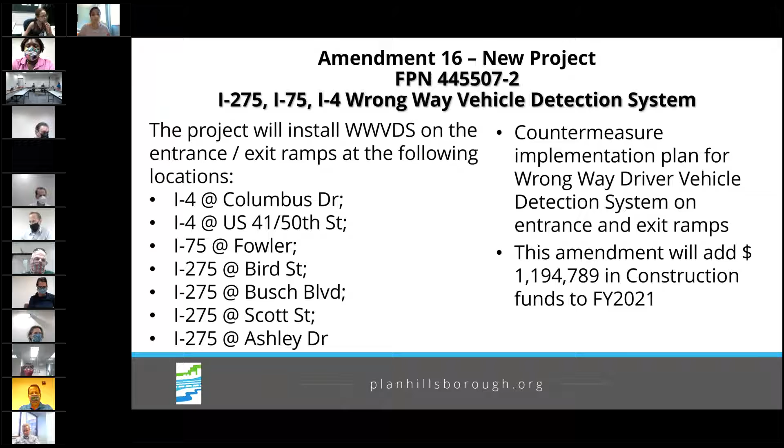Again, this is the comparative report. As you can see, the funds added are ACID, which is Advanced Construction of Safety Intersection Crashes, adding up to 1.2 million, added to FY 2021 as construction funds. It's part of the Vision Zero project for the LRTP reference.

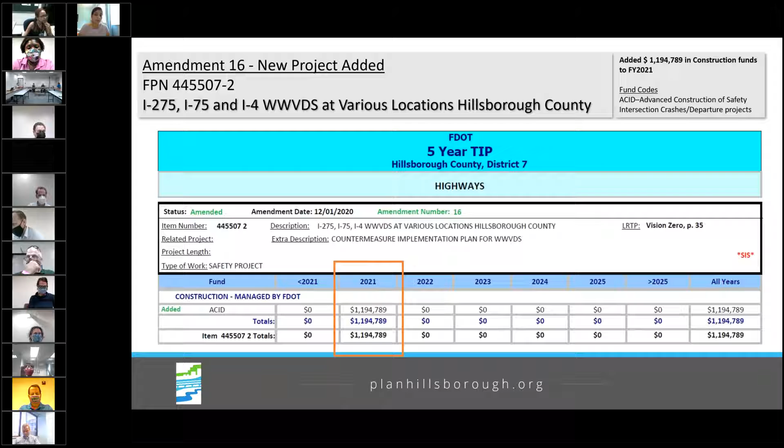The third amendment is also a new project, for adding various lighting in the corridors at various locations in Hillsborough County. FDOT has identified 5 corridors along Hillsborough County to help with the lighting retrofit at existing poles. Previously the lights used to be yellow lights, and they are upgraded to the latest LED technology, which will help with better safety.

These locations were specifically added based on nighttime crashes, and it helps to mitigate that. The various locations are Hillsborough Avenue from Dale Mabry to 275, 301 from Baum Road to Bloomingdale Avenue, 674 College Avenue from US 41 to State Road 60, and US 301. This amendment will help add about 1.835 million to construction funds in FY 2021.

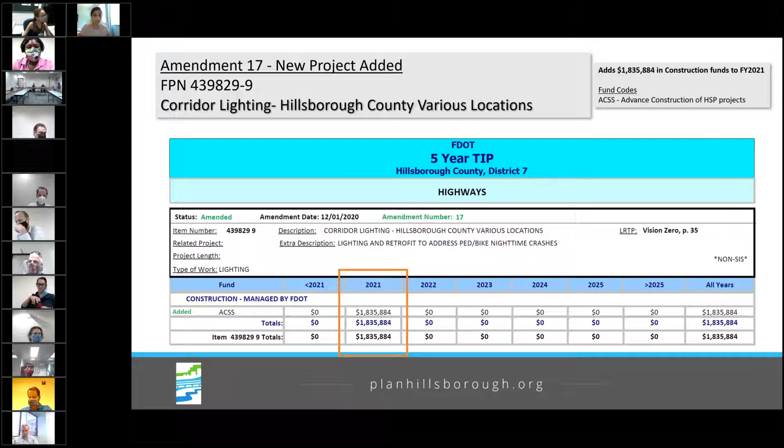With this, I will move on to the last slide, which will show my request. My recommended action is to request you approve these TIP amendments and forward them to the board for approval. If you have any questions, you can ask them now. Thank you.

Okay, any questions for anyone? About anyone?

Okay, Nicole, have a question? Yes, I just wanted to know for the wrong direction indicators, were those 5 areas of instance where that happened? Do you know?

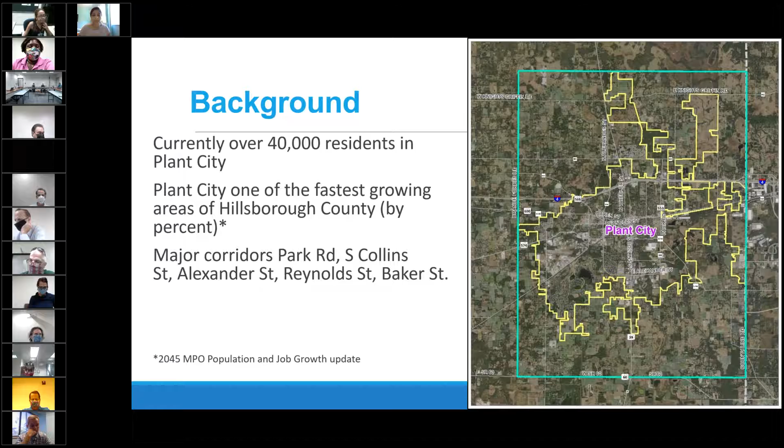Next slide please. I would also like to tell you the study purpose and outcomes. The study will be exploring two kinds of transit options in Plant City. One is a transit circulator, which will provide operations within downtown Plant City. The second is an express route or limited stop service, which will operate from Plant City to Tampa. We will also explore the possibility of providing a service to Lakeland in the future, but that will require further coordination.

We evaluated the routes and services based on the cost, potential ridership, and performance measures - I will go over them in detail. At the end of the study, we will identify the service areas, which are the current areas and the future growing areas to meet the demand for growth. The study will recommend a set of final proposed alternatives, which we would present to HART and Plant City, and also the MPO committees and the board. The final decision will be made after this report, with talks from Hillsborough, HART and Plant City.

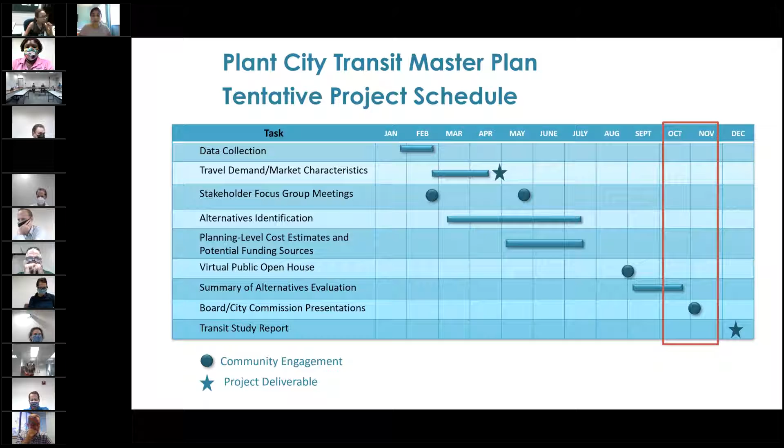Next slide please. Again, as I mentioned, we started the study back in January. We've had several stakeholder focus group meetings throughout the study, and we've also been presenting to the committees, HART, and Plant City. The final part of the study will be a transit study project report, which we are currently working on in draft form, and then it will come to the board for final approval.

Next slide please. Because we wanted to explore what was available in the past, the study looked at previous transit service that existed, and I will go over them. Next slide please.

As some of you might know, Plant City had two kinds of transit services in the past at different points of time. The first was a Strawberry Connector, which operated from 2001 to 2005. It was initially run by HART, and later the city took over it until 2008. The highest annual ridership was almost 47,000 at the peak in the 2006-07 years, but finally they had to cut it down due to cost constraints. The second service was an express service called the 28X East County service, which operated two services initially, and then was cut down to one, from Plant City to Tampa, from 2010 to 2017.

It also saw peak annual ridership around 2012. Later it had to be cut down when HART had to do its comprehensive operation analysis and redo their budget.

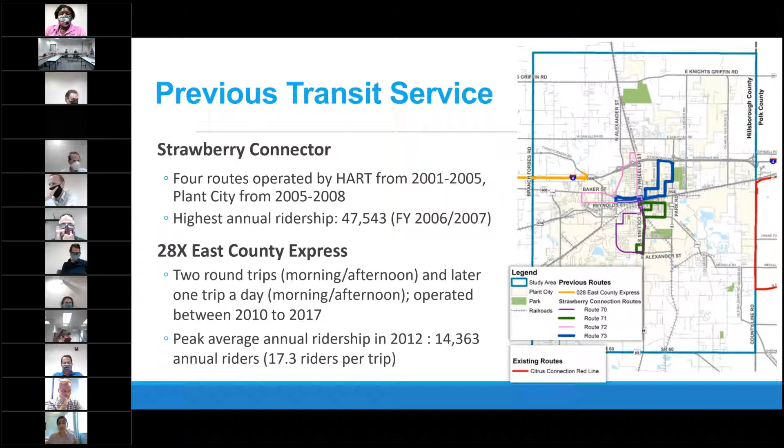Currently, if you notice in the map, the yellow line shows the 28X, and the other four colors around downtown show the Strawberry Connector. But currently there's only the Citrus Connection, which is the red line, operating in Polk County along County Line Road.

The study explored the commuting characteristics and existing conditions to know what exists today and what will be needed for the future.

Among other factors, we looked at commute patterns in zero-car households. It can be seen that 84% of workers drove alone. 18% of residents travel less than 10 minutes to work, meaning they live very close to their place of work. The mean travel time is approximately 24 minutes, and about 2% of households have no vehicles.

If you look at the map, the areas with darker colored shades show zero-car households, and the darker the color, the more households. These are the people who need transit the most.

Upon analysis with the MPO's communities of concern map, which includes people falling under categories like minority, racial, or limited English proficiency, this map also lined up almost according to the communities of concern map, meaning these people also need transit the most.

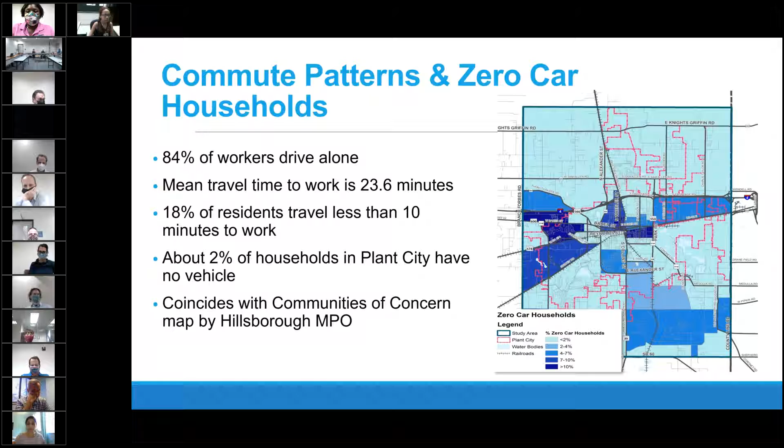They are mostly for doctor appointments, medical trips, grocery, and family, childcare, community center, etc. But people have to qualify as low income to be able to ride the Sunshine Line, so that's another constraint.

A main part of the study was the outreach efforts. I will go over them in detail.

As mentioned earlier, we had community stakeholder meetings at various points of the study. The first was in February 2020, conducted at Plant City Hall. We had close to 30 attendees, and it helped identify the stakeholder group.

The second meeting was unfortunately virtual, in May 2020. An initial set of alternatives was presented to the committee through a GoToWebinar meeting. Following the meeting, we distributed a survey with around 120 responses, which helped shape the alternatives better.

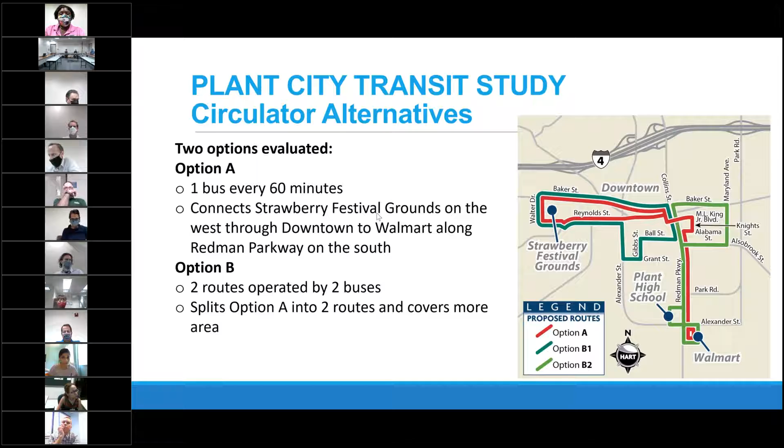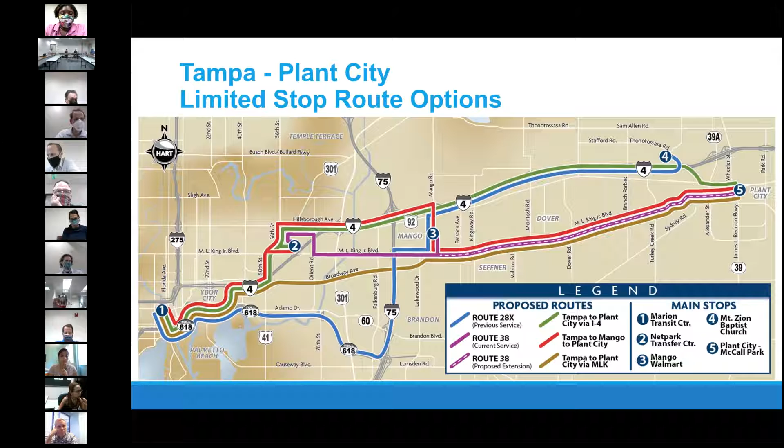Please remember these are only planning-level cost estimates and do not represent final costs. The operating costs vary roughly between $900K and $1.2 million. The frequency also varies between 45 and 60 minutes, operated by 2 buses. The distance is pretty much the same across options, except for the extension, which covers a lesser distance.

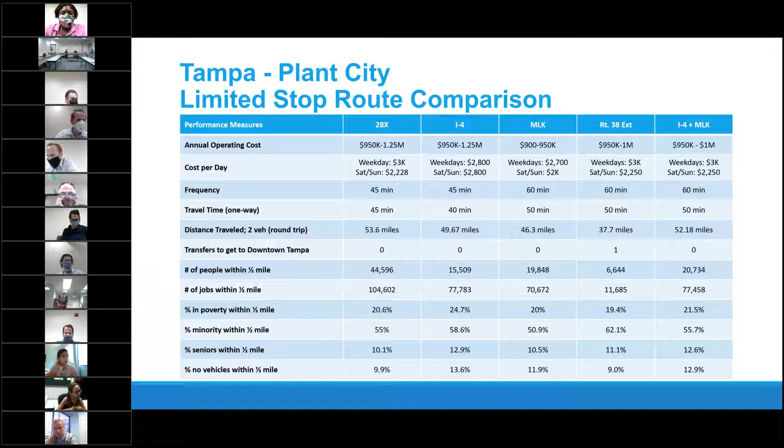The number of people served by different routes varies — I'll give you a minute to look at this. Some routes serve more people than others; these were only explored as possible route options. The number of jobs served also varies for each of the 5 options, but the cost is what will be used as a comparative measure for the performance measures. With that, we can move to the next slide.

So I had mentioned earlier that we did have 2 surveys at different points of the study. One was to the stakeholder committee, but there was also an open to the public survey. We distributed it through our social media and also through forwards from our stakeholders, who were passing the information to some of their connections. And the second one was a virtual open house.

What we learned from these surveys was that people were generally in support of the service. It would open up more opportunities for jobs and economic growth, but there was a challenge of providing reliable connection and coverage for all the services. The public also perceived that they needed a better transit hub connection at Plant City downtown, requiring more comfortable facilities and shorter waiting times.

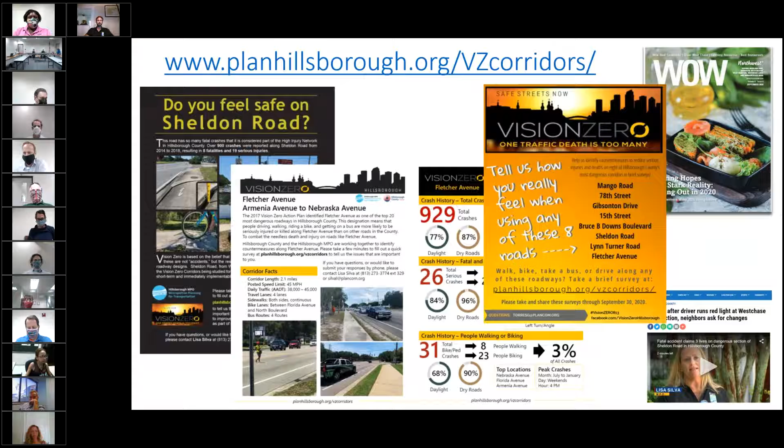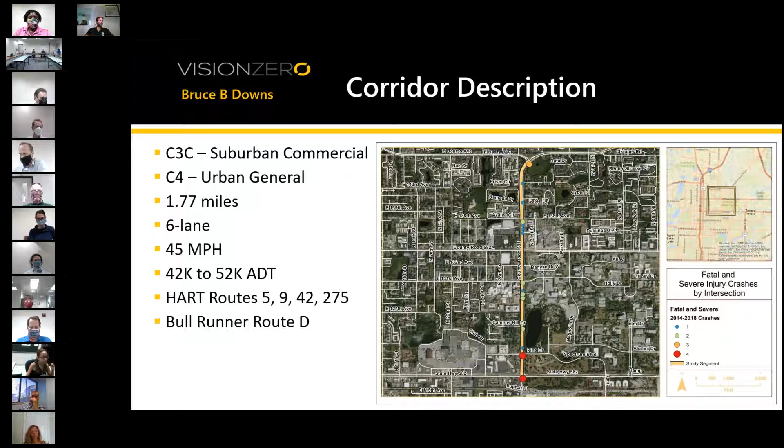So starting with Bruce B Downs, I'll go through some of the recommended improvements. This corridor description: it is a 6-lane corridor, 45 miles an hour, 40 to 50,000 cars per day, so a busy route.

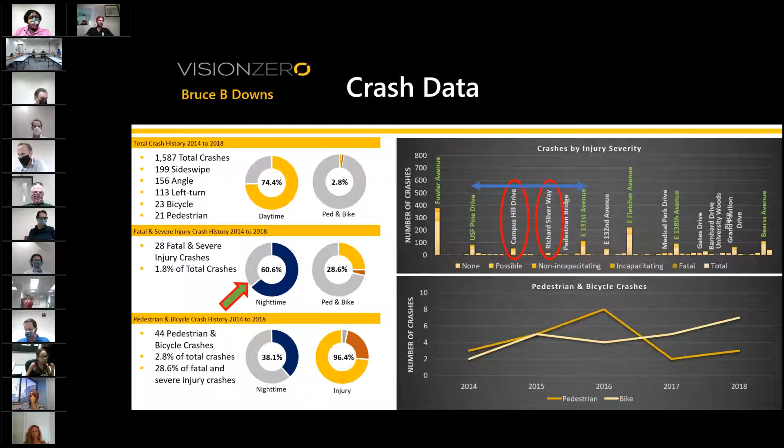Just a little look at the crash data. You can see that the big ones were Fowler, Fletcher, and Bearss in terms of total crashes.

And then just a quick look at some upcoming projects in that area: new traffic signals at Campus Hill Drive and Richard Silver Way, and the construction of a new 10-foot sidewalk along the east side of Bruce B Downs along the university.

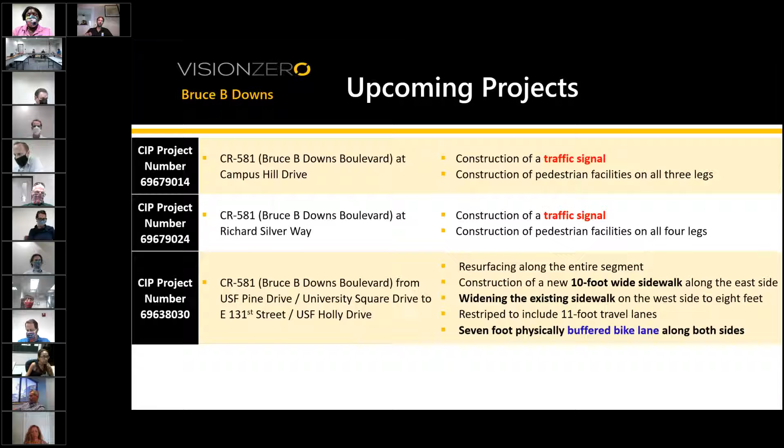So corridor-wide, some of the recommendations. One is lowering the target speed to 35 miles per hour, and 40 from Fletcher to Bearss.

That will be accomplished, or is proposed to be accomplished, by having a dedicated shared use path, channelization of pedestrians to those protected crossings, and reducing the width of the travel lanes for at least the segment from Fletcher to Bearss. As far as ADA, upgrading all of those crossings to ADA compliant crossings.

Some signage and pavement markings, as well as roadway and drainage improvements, and lighting improvements at the signalized intersections in those locations.

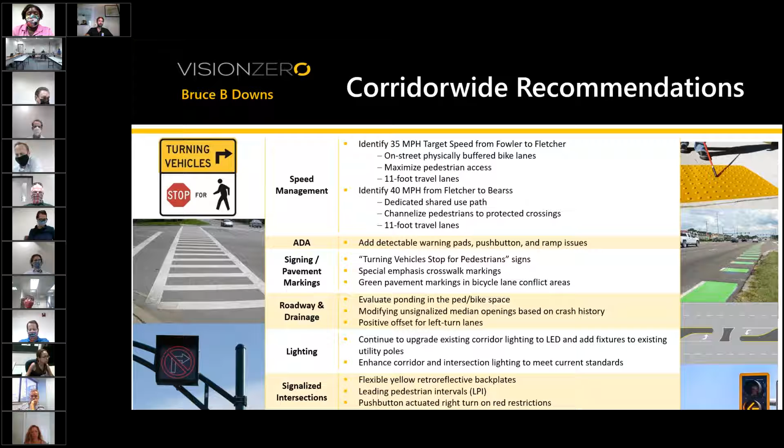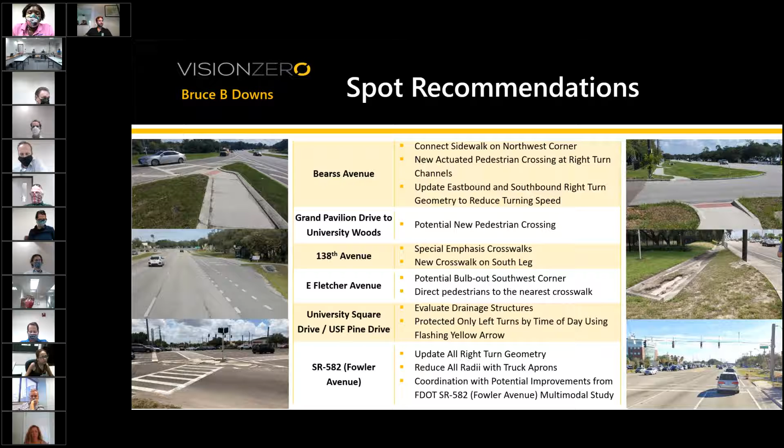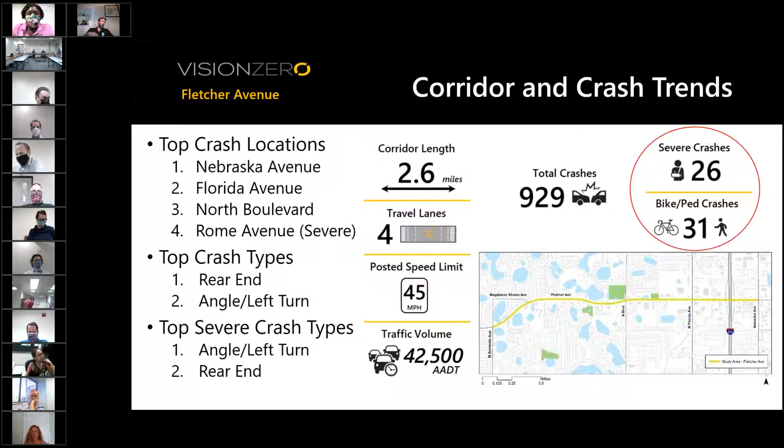Moving on to Fletcher, some of the top crash locations. This was, by the way, from Armenia to Nebraska. Some of those top crash locations are at Nebraska, Florida Avenue, North Boulevard, and Rome. Rear end and angle crashes were a big part of the issue here.

People use this corridor for all of the various activities that they do, but the intersection improvements and the high-speed traffic, as well as access control, were some of the big issues that came up there.

So in terms of improvements on this corridor, again, a lower target speed, 35 miles per hour, signal timing and phasing, so having the flashing yellow arrow and the signal progression, additional roadway lighting, as well as traffic signal backplates and pavement and crosswalk markings.

Some of the sidewalks need some maintenance, and there are some proposals for raised medians to limit some of those turn movements.

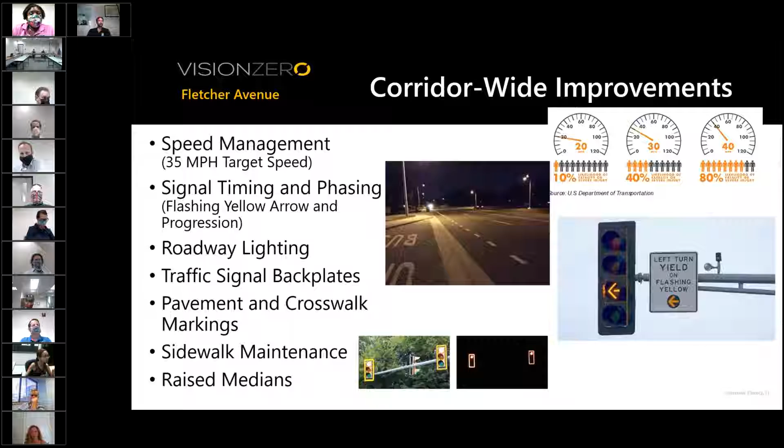Just going through a couple of the intersections, you can see at Armenia the additional raised median as well as the turn lane and those crosswalk legs on the southwest corner there.

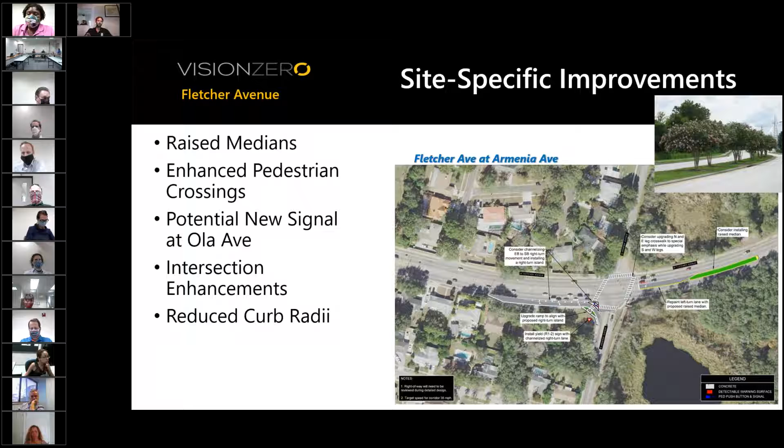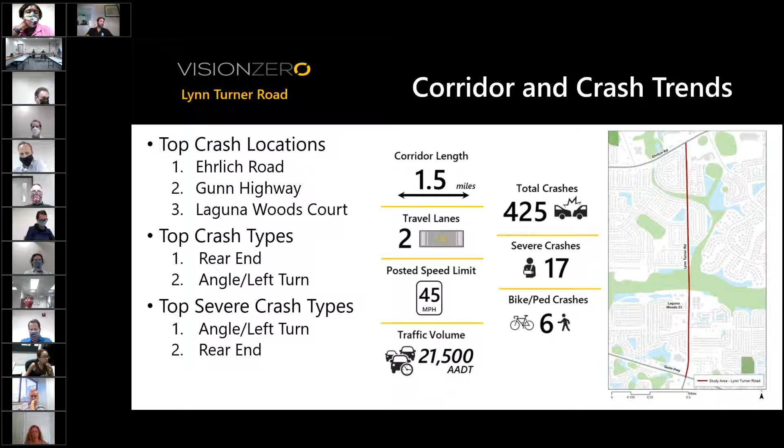Moving on to Lynn Turner Road, this is from Ehrlich to Gunn Highway. Just some of the crash data here. It is just a 2-lane section. The posted speed limit is 45, handling just over 20,000 vehicles a day. Some of the concerns are the high speeds, unsafe turn movements, and poor lighting.

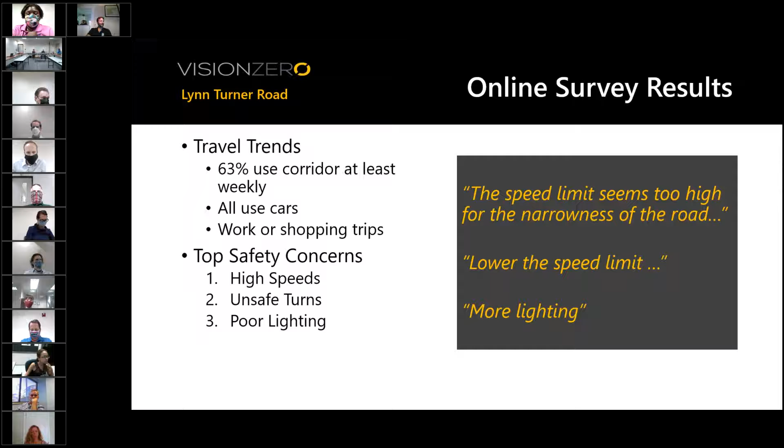And in terms of travel trends, I do not believe anybody who walked or biked along this corridor responded.

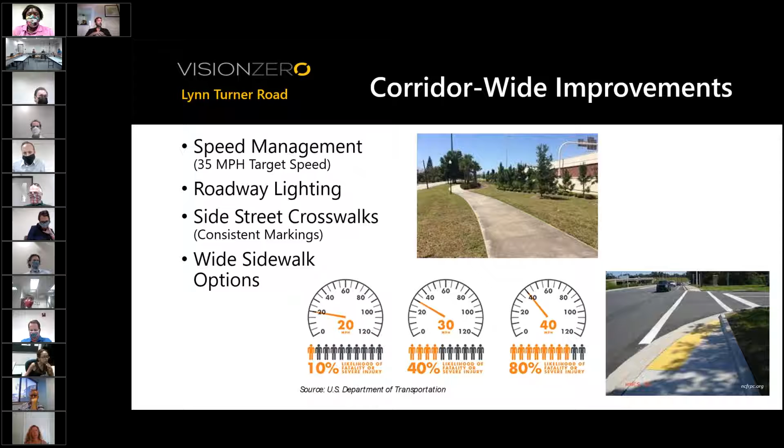So in terms of corridor-wide improvements, again, a 35-mile-per-hour target speed, so that's a reduction. Additional roadway lighting, and crosswalks on the side streets, as well as a wide sidewalk option.

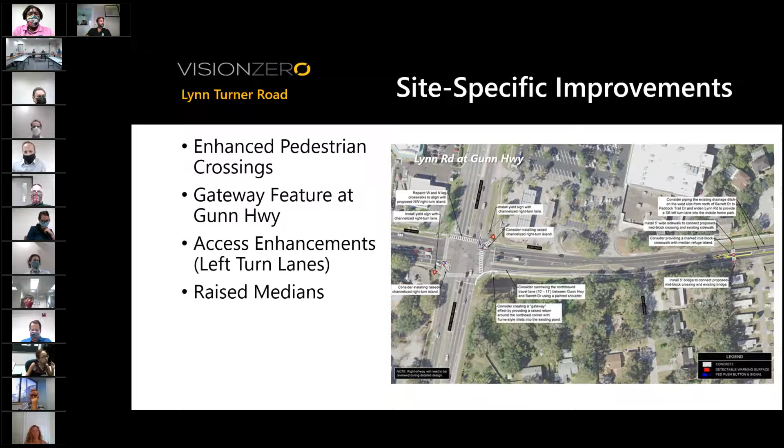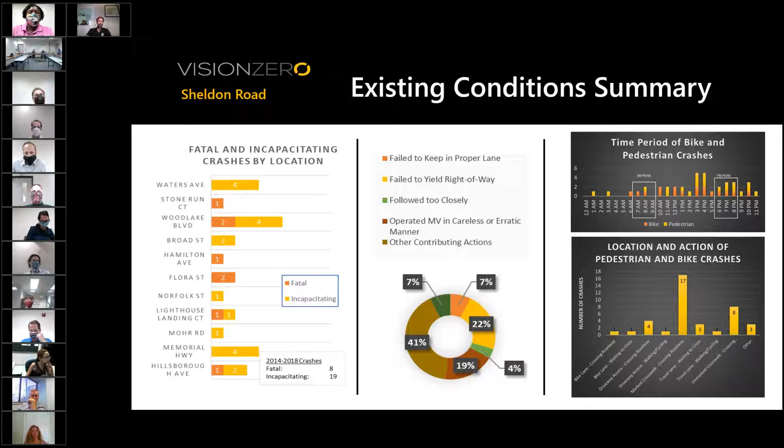Some of those trends, again, where those crashes took place. And then a little bit of the community input: nobody really thought it was great for walking and biking, and even for driving it only received 3 stars, but still mostly daily or weekly users were responding in that survey.

The safe people category includes high visibility crossings, wider bike lanes, bus stops, and shade trees near those bus stops, which is more of a suggestion for implementation.

And enhancing those trail connections, particularly where the Town and Country Greenway crosses Sheldon and then connects up to the Upper Tampa Bay Trail.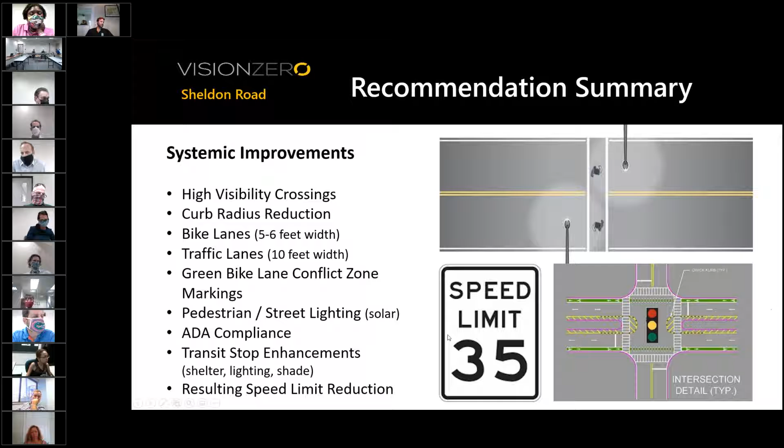Just a couple more recommendations: reducing the curb radii, increased width of bike lanes, decreased width of traffic lanes, higher visibility crossings, green bike lanes where those conflict zones are, pedestrian-oriented street lighting, upgrading the crossings to ADA compliant crossings, as well as transit stop enhancements and a resulting speed limit reduction due to those improvements.

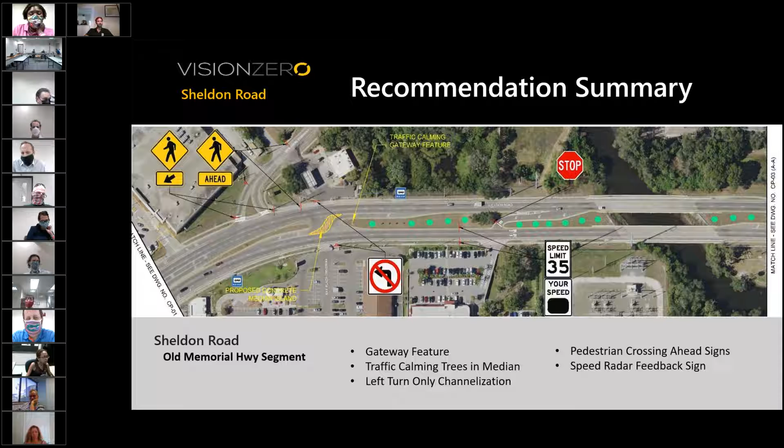Just going through a couple of these, you can see the proposed concrete medians for traffic calming and for reducing some of those turn movements, enhanced signage, as well as some additional upgrades to those crossings and the use of Qwick Kurb where possible to shorten some of those crossing movements for pedestrians as well as others.

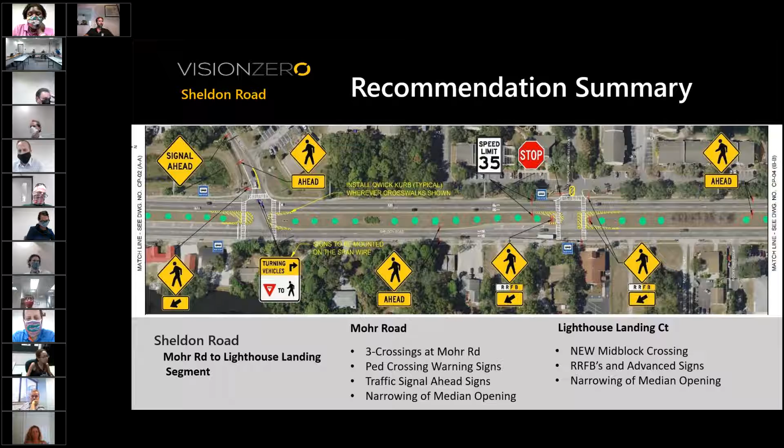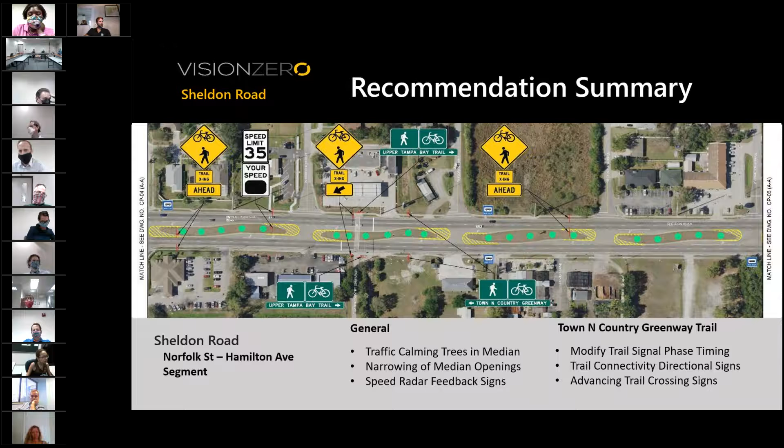Again, just continuing on with those paint and roadway markings, as well as the trail crossing which I mentioned before, and additional signage related to it. Again, just some more of those related to extended school zones, traffic calming, and narrowing the median openings.

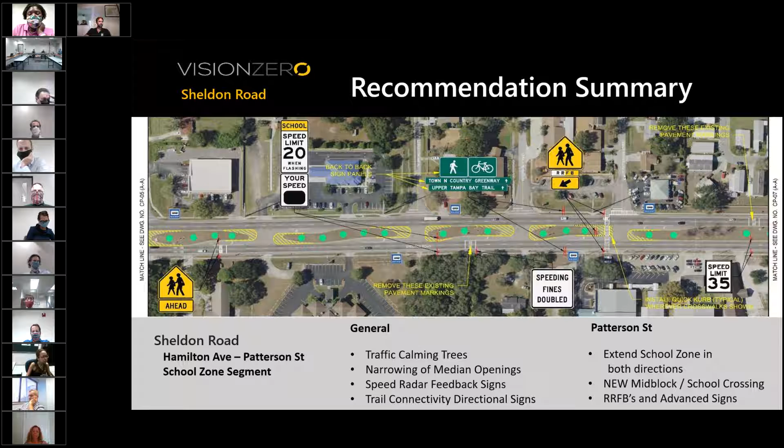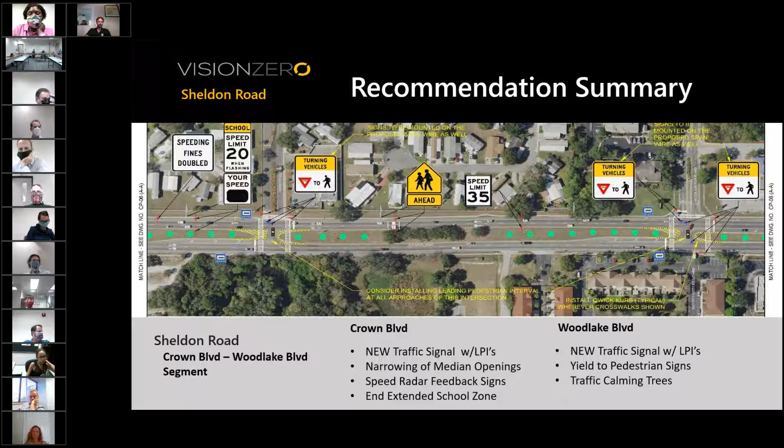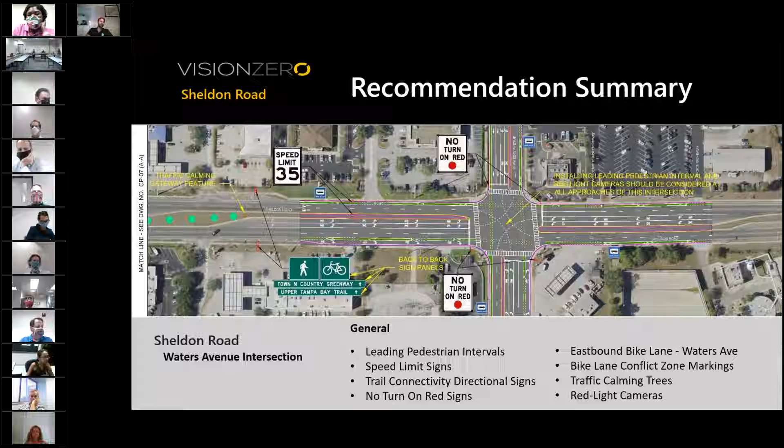All right, moving on to 78th Street. One of the big issues was transit in this corridor, so you'll see a lot of changes related to that.

Just to point out, Palm River Road, which recently received some upgrades, we've proposed a couple of additional things, just because this intersection did account for a third of crashes on the corridor, such as extending the curbs, but using possibly mountable or just paint solutions so that we don't restrict freight movement.

And we'll be seeing some pedestrian refuge islands as well as street lighting as we move forward in this.

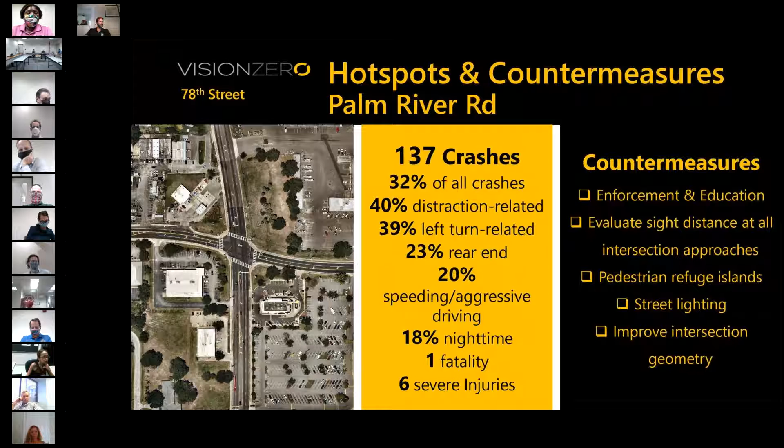So some of the short-term recommendations on 78th Street. I believe we actually had looked at reducing the speed limit from 45 to 40, but we do have 35 in here, so I'll have to make sure that's correct. But that's accomplished through narrowing the travel lanes and providing an outside buffer, relocating some cross-street signage and stop bars to provide better sight distance, installing raised landscape islands and mid-block crossings.

As you can see in the picture here, we proposed a mid-block crossing. We've actually proposed four of them, but just relocating those bus stops slightly to be directly across from each other, where users could use those crossings more easily and not run across 100 feet down the road where the current bus stop is. So in the midterm, possibly reconstructing and widening sidewalks by paving buffer space and enhancing the street lighting as well are suggested here.

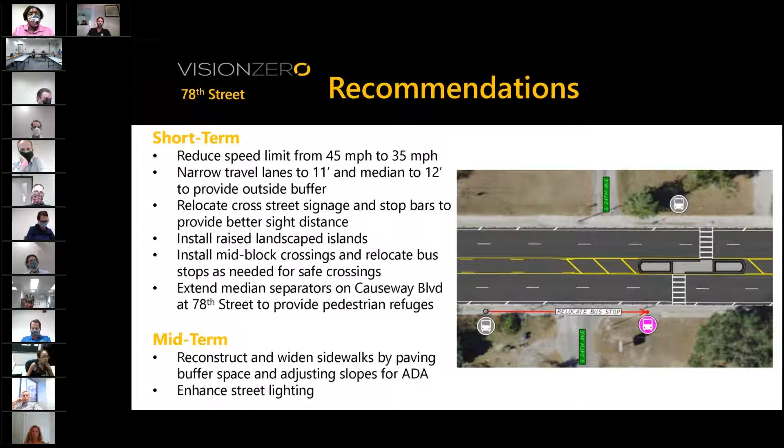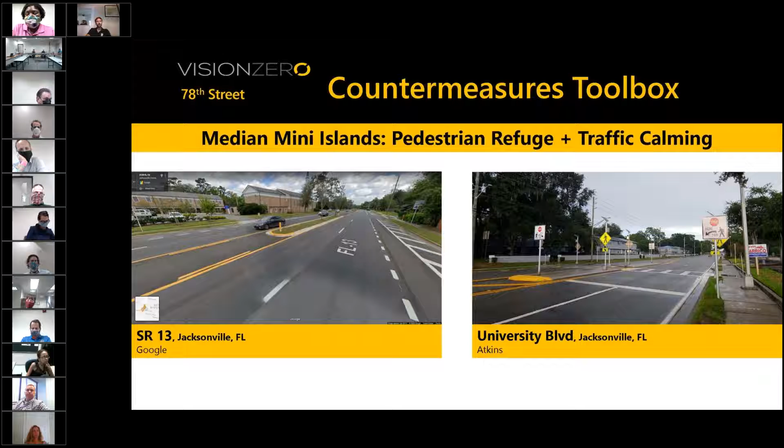We did also explore an alternative concept, which would involve changing this from a 5-lane section to a 3-lane section with buffered bike lanes, which is included in the report. Just a couple of those improvements. These are similar improvements in Jacksonville and what those could look like installed here.

So moving on to Gibsonton Drive, which is also Boyette Road. The proposal is to reduce the speed limit from 45 to 40, accomplished through narrowing the travel lanes and expanding the outside buffer, filling the sidewalk gaps, providing crosswalks and ped signals at all intersection approaches, extending median separators at intersections to provide pedestrian refuges where feasible. And I'll get into the I-75 ramps in a second, but restricting left turns as well as restricting unsignalized median openings and installing some illuminated cross-street signage on mast arms to help those movements.

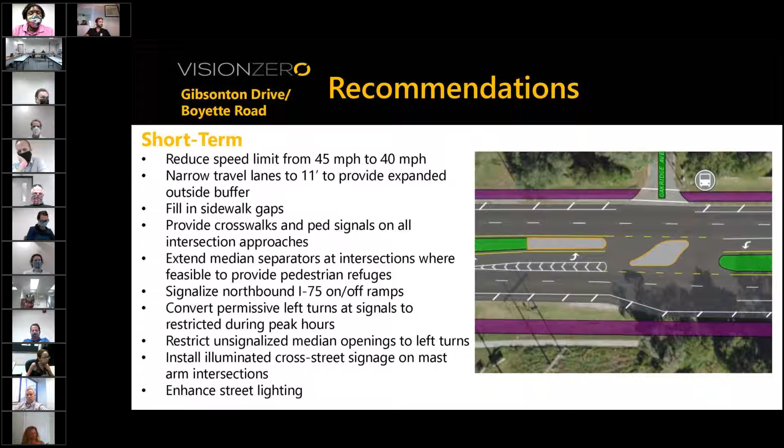Just an example of the existing typical section and the interim proposed. You can see on the bottom right there, a multi-use trail is proposed, as well as the reduced lane widths here.

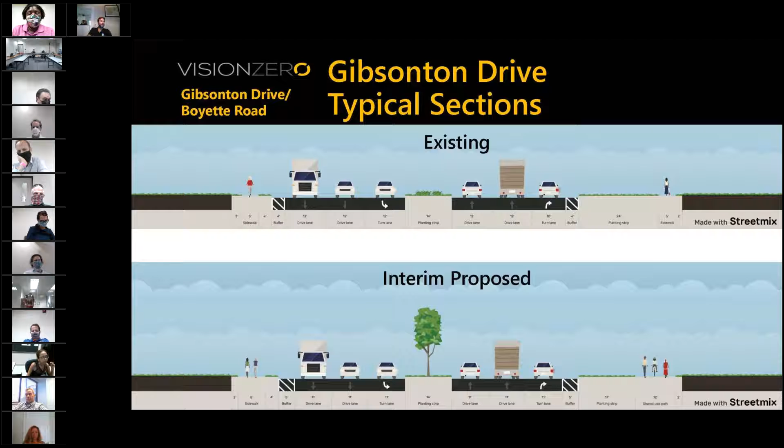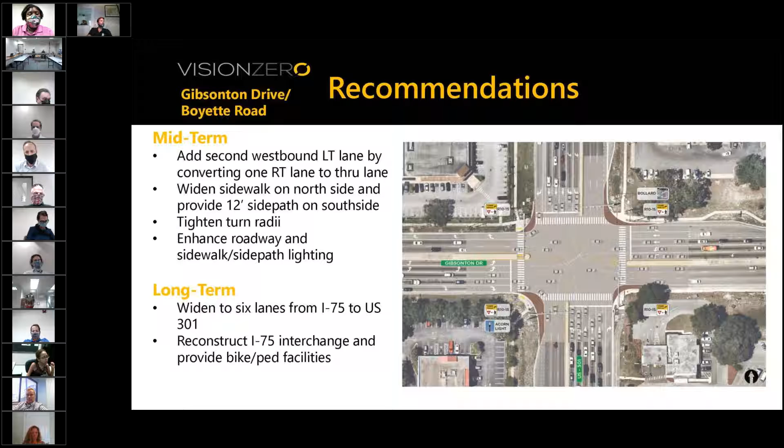So looking at some of those midterm and long-term recommendations, one of the long-term recommendations is widening Gibsonton Drive to 6 lanes where it is currently 4, from I-75 to US 301. So what that would look like in the long term is a similar section. You can still see the shared use path on the bottom right. The reason that it was set so far off in the previous one I showed you was to allow for that widening, as well as you can still see in this the reduced travel lanes, enhanced sidewalk facilities on the north side, which would be the left in the bottom picture.

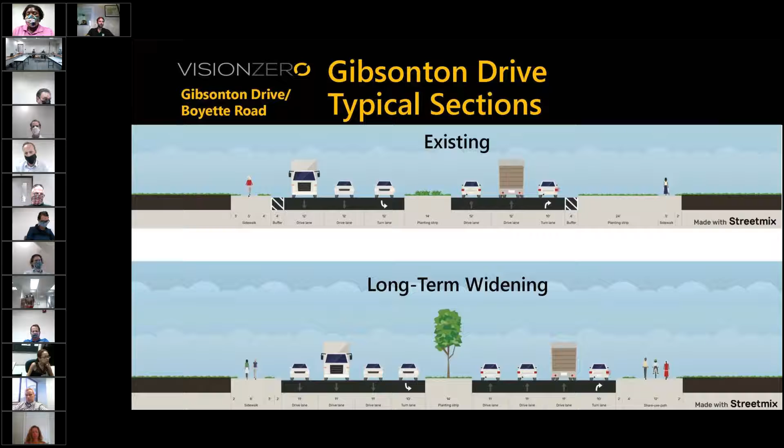Just moving on to the I-75 interchange here. So some of the countermeasures, pedestrian crossing paths along the interchange. We have seen pedestrians and cyclists crossing I-75 on this in the shoulder every time I've been out there, and on Google Street View it also is visible.

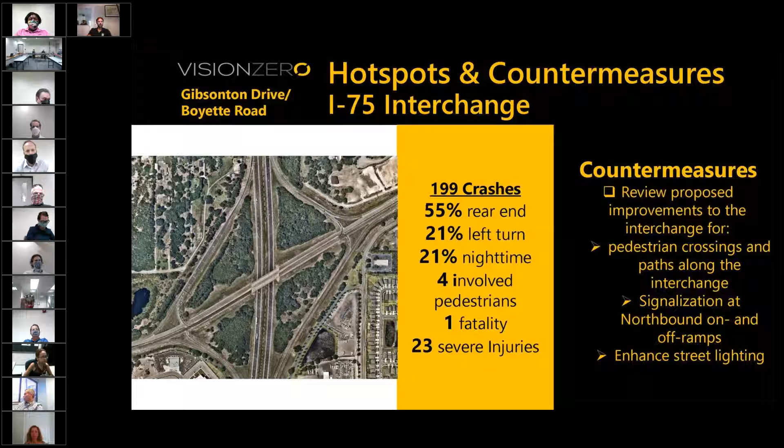There is a project at this to reconstruct the northbound portion, at least in this interchange. So adding signalization where there isn't, and enhancing the street lighting in this interchange, are part of the recommendations.

Moving on to Mango Road, these are some of the existing conditions. You can see some of the drainage issues, some sidewalk gaps, some broken sidewalks, and drop-offs along the shoulder of that road.

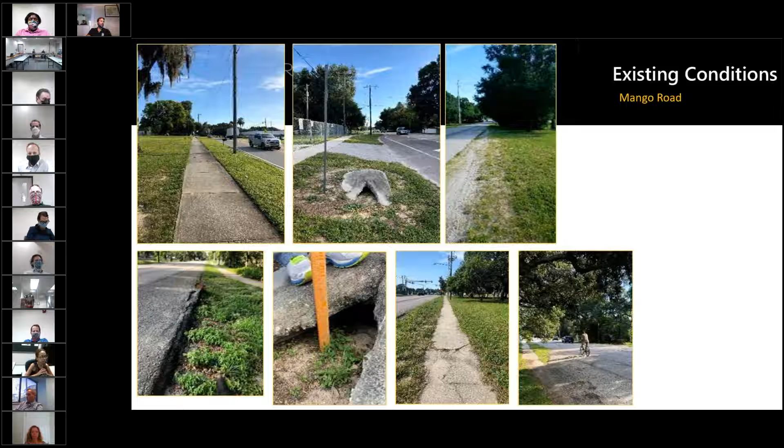One project that is programmed in the CIP is a roundabout at Old Hillsborough Avenue. It's alternative 6 from the CIP report on that. There is the only additional recommendation here, which is adding speed feedback signs due to the grade change coming into that.

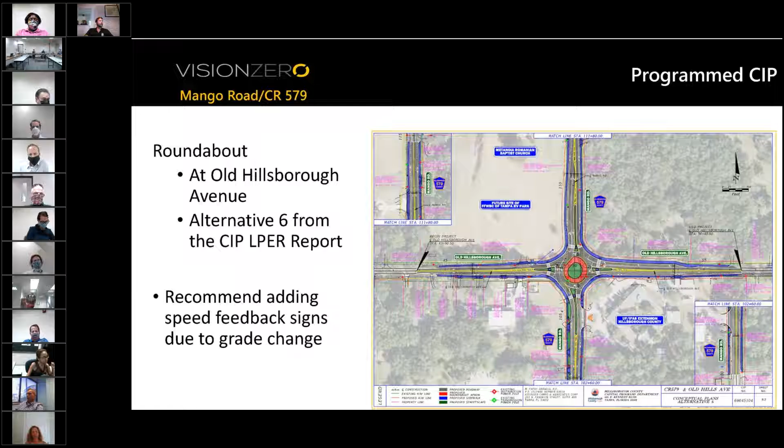Again, looking at maintenance on the roadway, updating those pavement markings and drainage improvements. Here you can see some of those additional drainage issues. Also lighting, traffic calming, and a few intersection improvements, which I'll get into in a moment.

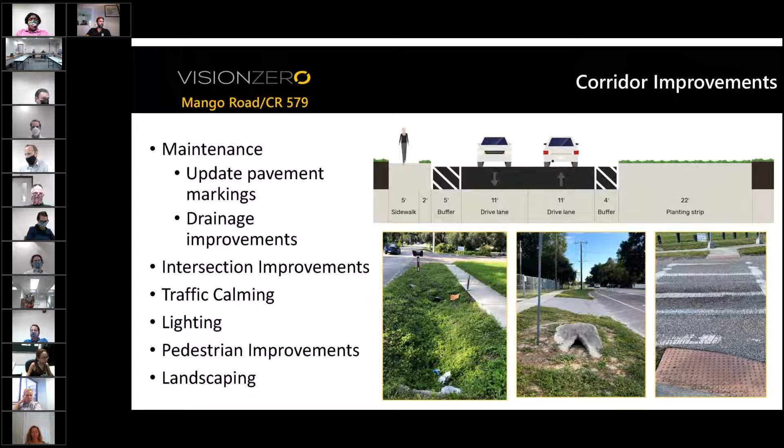For the pedestrian improvements on the right side here, you can see those gaps marked 1 and 2. The one marked 1 is from the Walmart to Mango Park. It's a short segment, but based on the well-worn path, you can see it's getting used quite a bit, and is a pathway used by pedestrians pretty frequently.

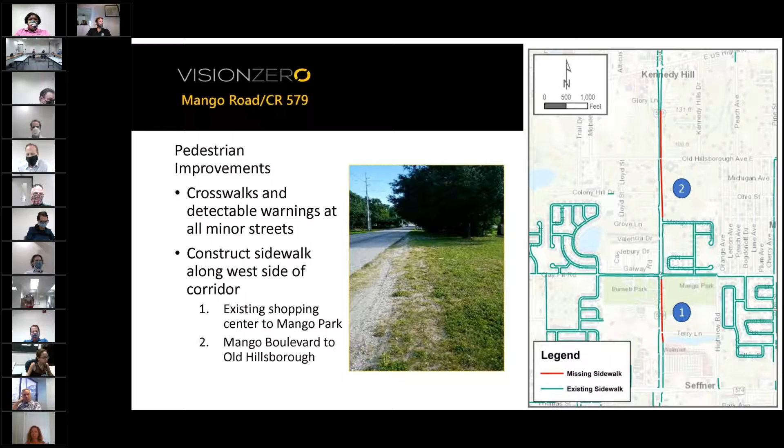Moving on to those intersection improvements, these are the main intersections here, but I'll go through them one by one. This is at Clay Pit Road and is a pretty good example of what is proposed: repainted crosswalks, signal backplates, enhanced curb and gutter, and adding sidewalks for connections to the crosswalks.

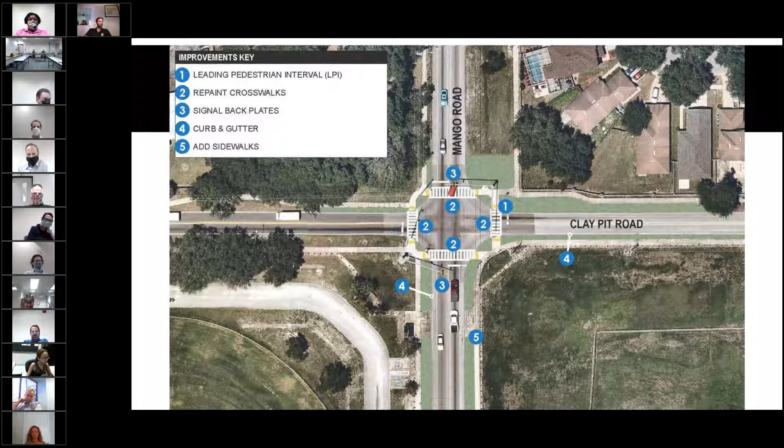Here's one at Canterbury Drive with a turn lane, as well as some additional curb and gutter to help stop people from going onto the grass around this, where the curb drops off, and to allow that through traffic, as well as create a safe place for people to make that turn.

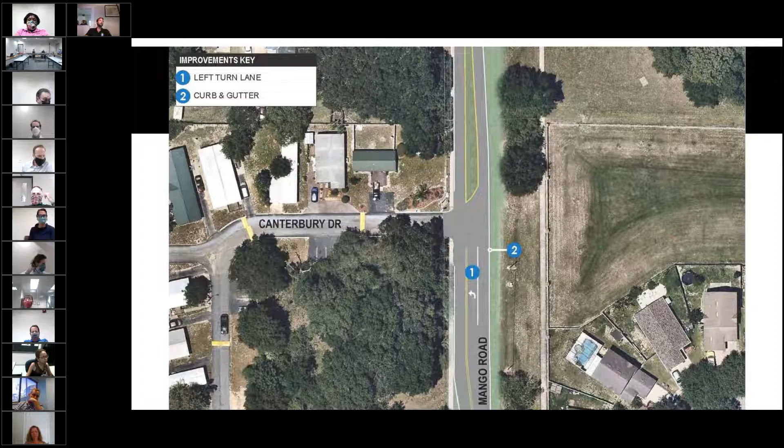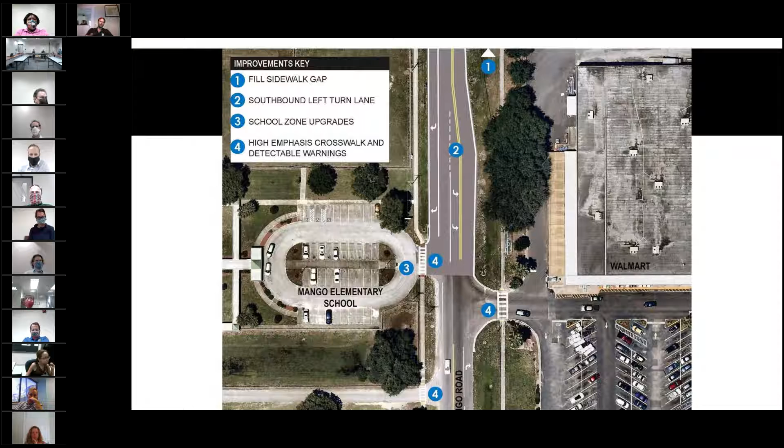But it would still have the benefit of allowing a right in and right out only from the Walmart. That would not totally restrict the ability to left turn out of that Walmart, because there is an entrance a little further north, marked as 4 on the right there. We'd also propose an added turn lane to allow traffic to more safely turn into the Walmart there.

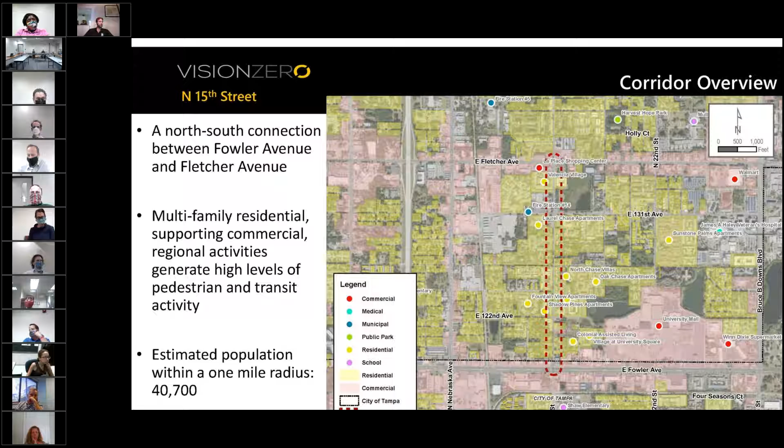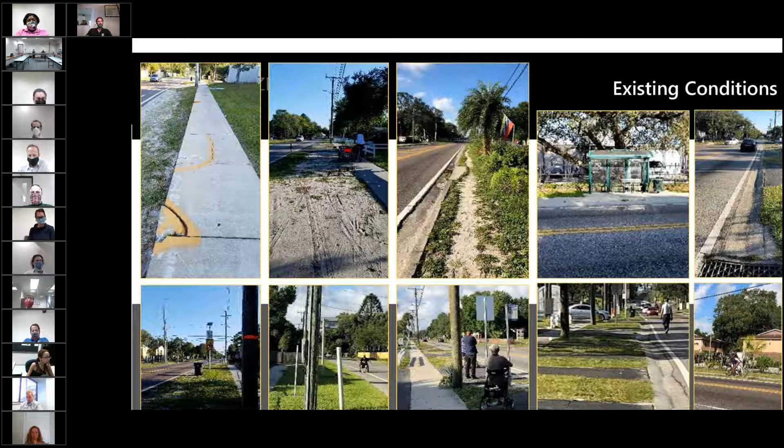Moving on to 15th Street, this is between Fowler and Fletcher. There are a large number of multifamily dwellings within the area, as well as supporting commercial. These are some pictures of the existing conditions - you can see some cracked sidewalks and sidewalk gaps, as well as a ton of users. This was the highest route for ADA users, by far.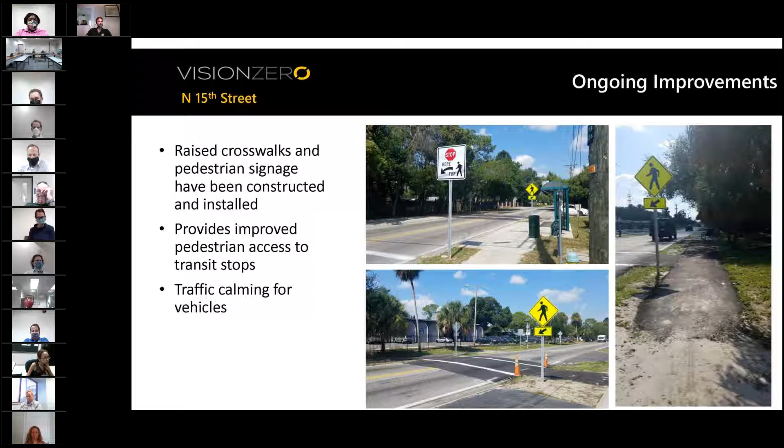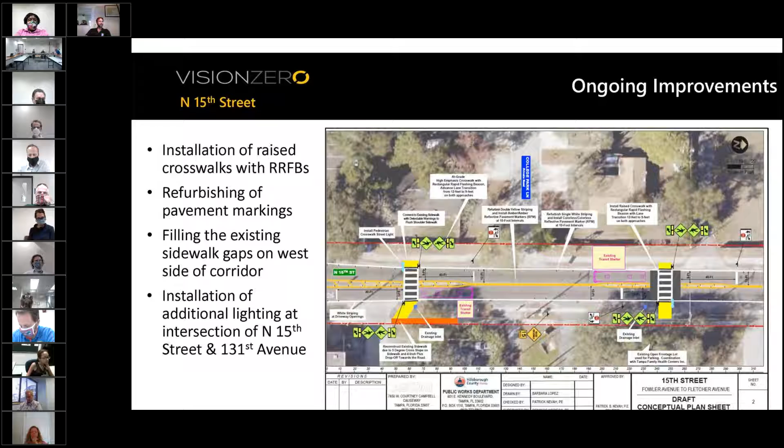Just a few of the improvements the county is currently putting in: raised crosswalks to increase visibility of pedestrians, as well as filling in some of those sidewalk gaps. This is another page from the plans for that project, showing where those are in relation to transit shelters and how the rapid flashing beacons are being installed along with those.

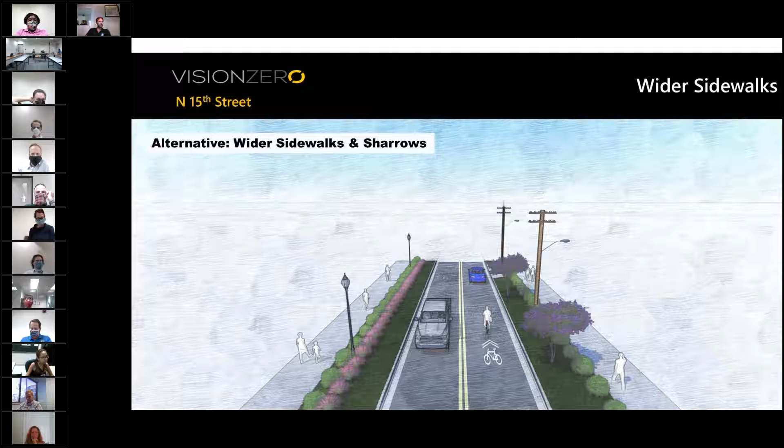Just a couple of alternatives we had looked at. This one looks at adding sharrows on 15th Street, shared lane markings. The traffic volumes may not support that, so we're looking at some additional concepts there. Then a little bit longer-term concept that would involve moving the curbs, adding buffered bicycle lanes, as well as still having, of course, the sidewalks in that area.

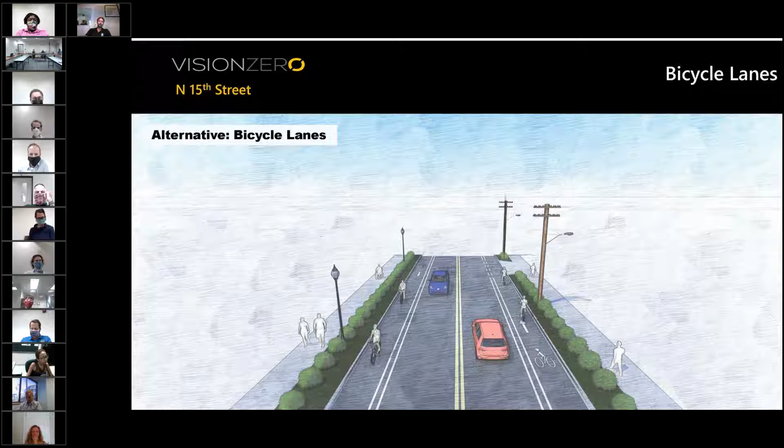And with that, I'm happy to answer any questions you may have. I know that was a lot. We have bumped this out for board approval to January to give us a little time to work through some of the comments we've received. But again, happy to answer any questions. Thank you for your time.

All right, thank you, Ray. Are there any questions from the committee? Any questions? All right, I don't see any. Oh, okay, I'll call that question.

Hey Mike, thank you so much for your presentation. Very interesting, this project is really good. I did have a question about relocating the bus stop on 15th Street. As you may know, HART is doing a service modification that will go in January, and part of that, we have to move... has anyone heard about this?

I didn't quite catch all of that, but I believe you mentioned the relocation of the bus stops on 15th Street - was that it, Nicole? Yes, yes, sorry - we know there has been some consolidation of the ones south of this corridor. We did talk to Justin Willits about that, but any of that certainly would need to be coordinated with HART during implementation.

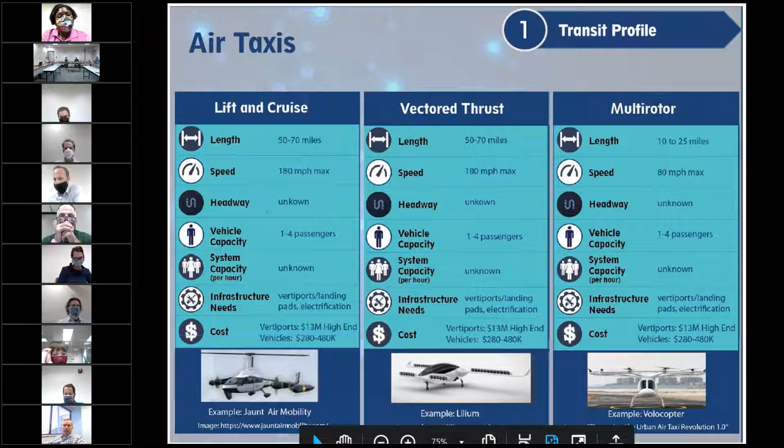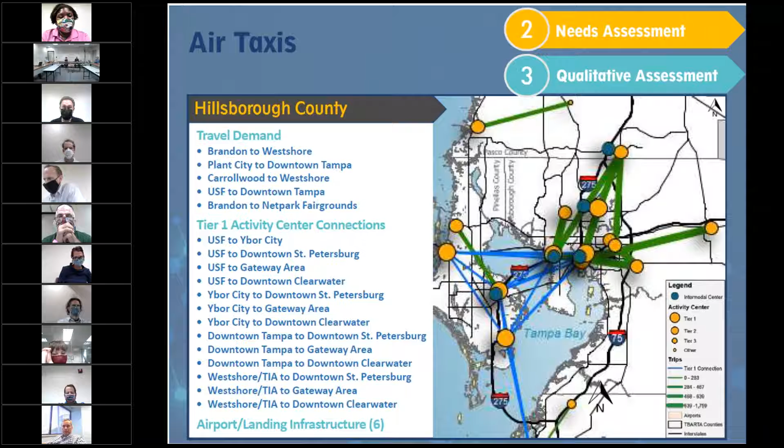So the study looked at possible connections within the Tampa Bay area for air taxis, for example USF to downtown Tampa, Tampa Airport to downtown St. Pete, and Clearwater. Next slide.

Now, what, if any, role TBARTA should have in air taxis is something we're still trying to figure out. Even on our board, there is not unanimous opinion about it. One of the recommendations from the study was that we should collaborate with NASA on work they're doing with local communities to model vertiport locations.

NASA is developing a regional modeling and simulation tool that evaluates and scores potential vertiport locations for air taxis. It's a GIS tool that breaks a city or county into 50 meter grid squares and overlays various layers of GIS data. What NASA does is work with local partners to identify which GIS layers they want to include in the tool and how much weight to assign to each layer.

TBARTA and the Hillsborough MPO have been working with NASA for about the last month or so on customizing this tool for Hillsborough County. Roger Matthey in a moment is going to talk more about that tool. However, if you go to the next slide, the last thing I want to mention before handing it over to Roger is that TBARTA will be hosting a free webinar on December 4th from 12 to 1 on the topic of advanced air mobility. You can go to our website to register. I think there may be one more slide, if you could switch.

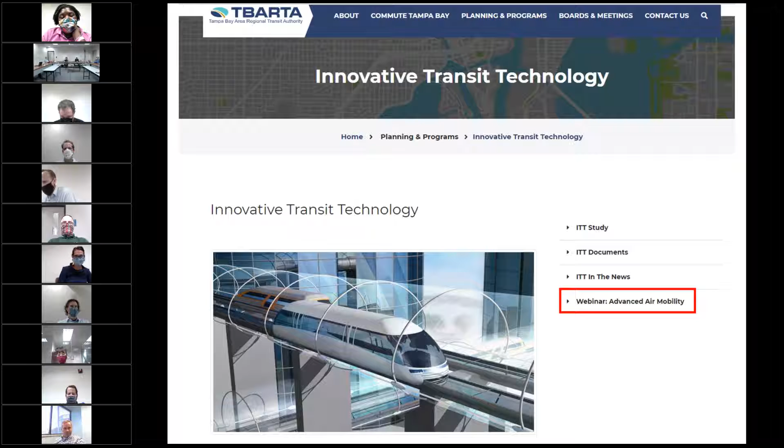Hi everyone, can you hear me? My name is Roger Matthey, I'm the GIS project manager with the MPO. We are working on this project with TBARTA and NASA.

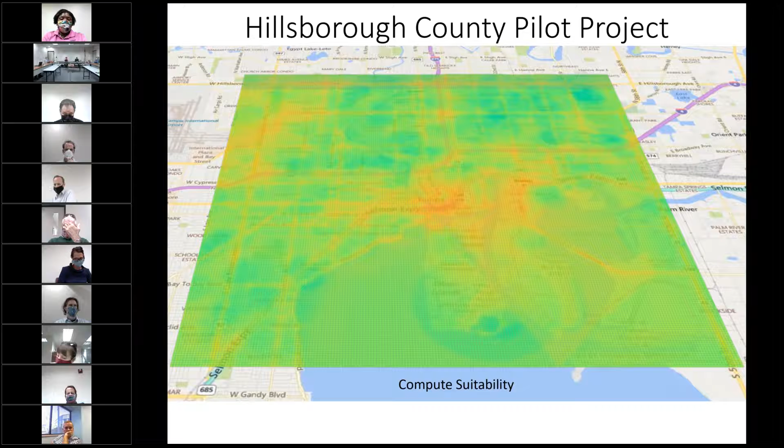Using the suitability values, a vertiport location is selected. In this slide, as an example, we selected a spot on the parking garage next to Amalie Arena. You can click on the icon and a blue or green box pops up showing some of the factors we look at, such as fire stations, hospitals, land uses, zoning, and being near or on the power grid. These air taxis are going to be electric and probably need a charging station to be plugged into.

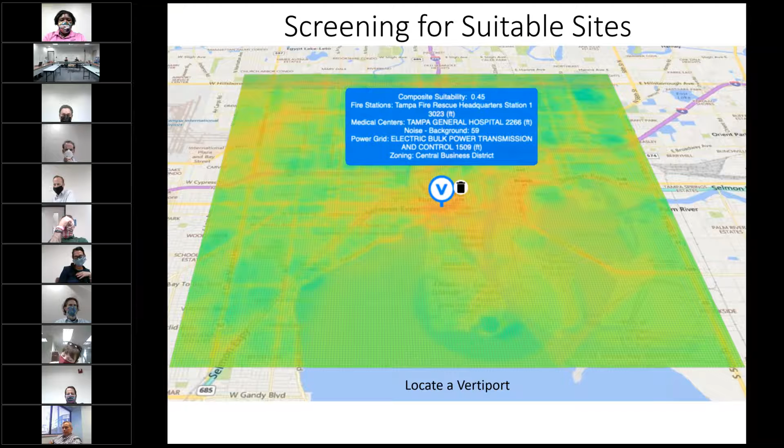In this slide, as an example of the simulation tool applied beyond Hillsborough County, our current test site, you can see the path of air taxis moving about between some major cities here in Florida. This model is also being developed in Ohio and Los Angeles right now.

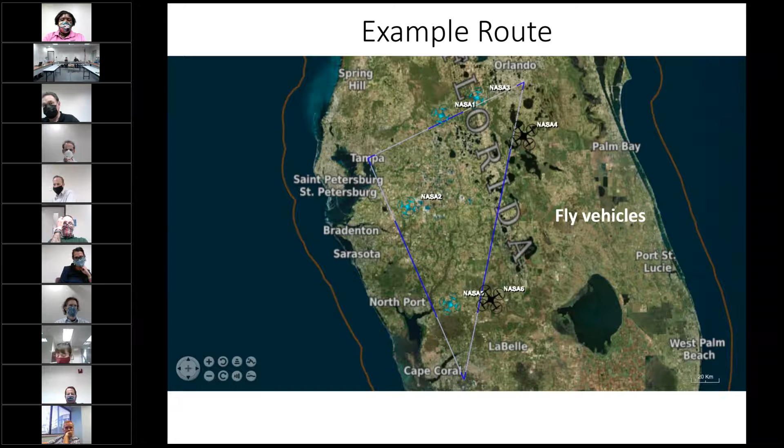Okay, any questions from the committee? I just had a question real quick. What is the benefit of an air taxi? What's the goal, the benefit to Hillsborough County of an air taxi, and what would the objective be? It seems like a very limited number of individuals would be transported.

I don't know if the question was directed to me, but I'm having difficulty hearing it. Who asked the question? This is Leland Dyson. What's the general idea? What are we looking to accomplish here with air taxi as part of transportation?

Well, to understand, the air taxi developers are in the private sector. This is not a public sector endeavor. It's basically an air version of Uber and Lyft.